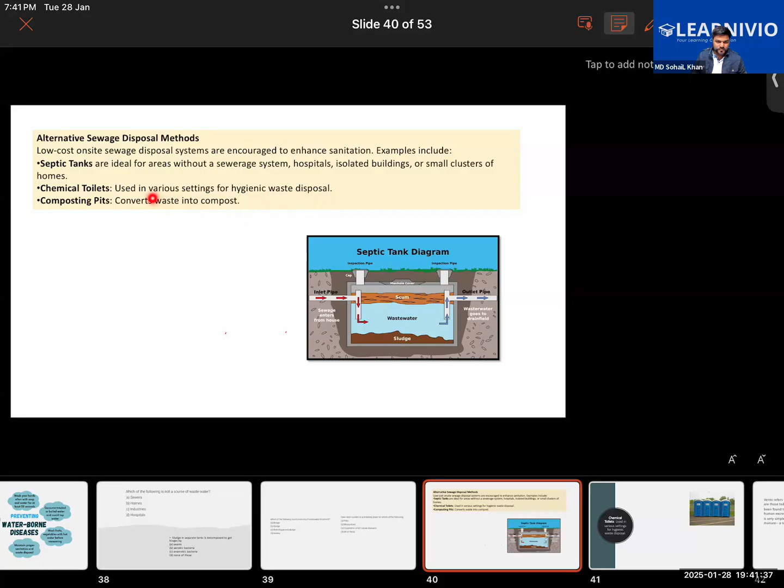The first is the septic tank. They are ideal for areas without a sewerage system, like in a hospital, in isolated buildings, or in small clusters of homes. So take a look at the septic tank diagram over here - that is a septic tank.

Now, in the septic tank, what happens? All the human waste would be going into the septic tank, getting it. And it has an inlet pipe which will be bringing it in, and it has an outlet pipe also.

A septic tank is often installed under the ground in houses or buildings, such as hospitals and schools, and it allows for the decomposition of sewage from home through the help of anaerobic bacteria. So what is happening here?

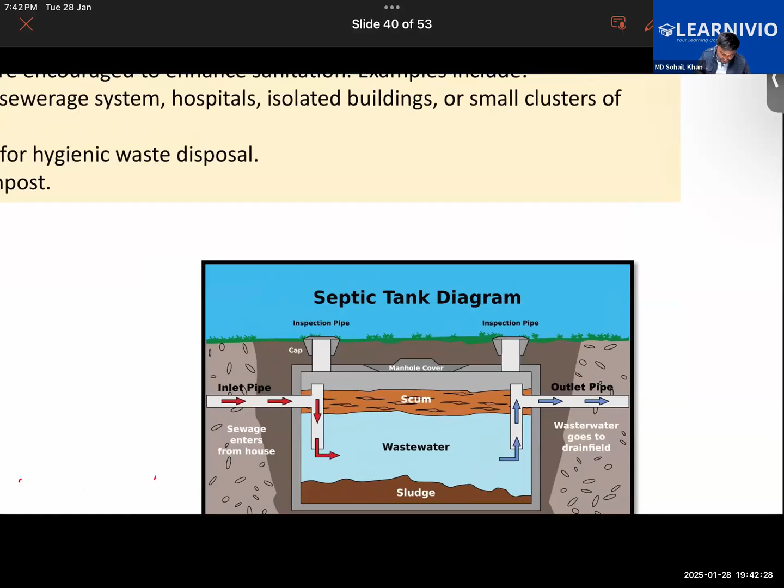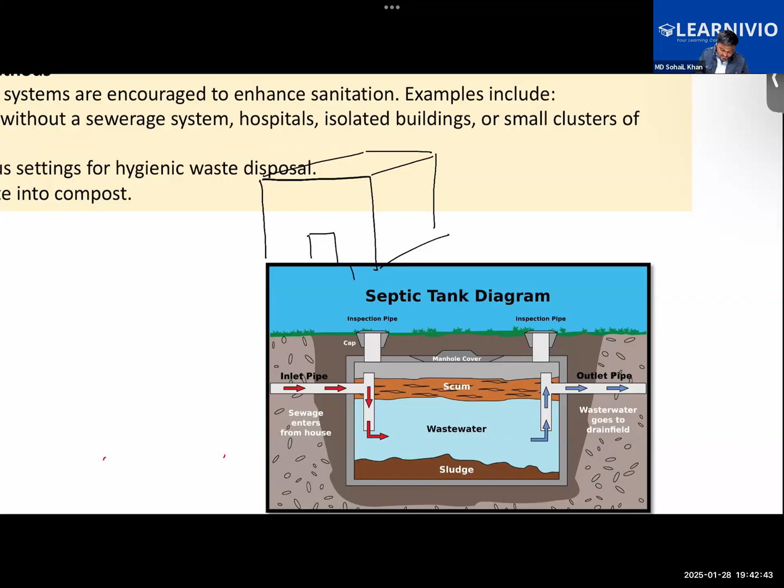See, there's a house, and all the waste from this house, all the sewage, is being sent into the septic tank. Suppose this is a pipe that is carrying the waste from the house to the septic tank.

Now, as the waste goes into the septic tank, with the help of anaerobic bacteria, it will be decomposed. With the help of which kind of bacteria?

Anaerobic bacteria decomposes the sewage that goes into this. So that is the main thing that happens in the sewage tank, in the septic tank.

Now further, there is an outlet pipe also. So what happens as the sewage enters this tank? The human waste, the fecal matter, the stool, will be settling at the bottom. The water will float above it, and there might be oil and grease particles also that will float on top of it.

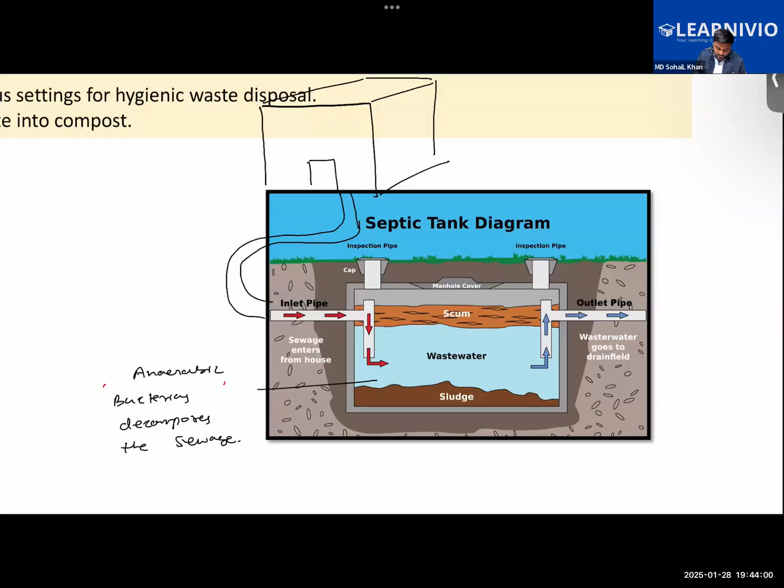So you have oil and grease like particles. They are lighter in density, hence they will float on top. That is called scum.

And on top of it, we have a manhole cover also, so that if there is some problem in the septic tank, if it is completely filled up, the sewage can be taken out through the manhole cover. Getting it, Razan?

And the waste water that accumulates in the septic tank, via the outlet pipe, is sent to the drain field. So that is how the septic tank basically works, and it is an alternate sewage disposal method.

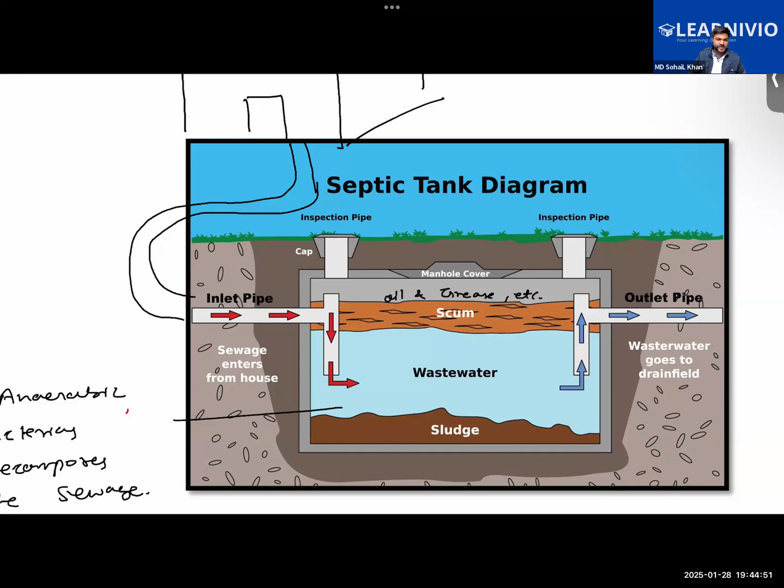Harim, right now is not the time for the class. We'll be having your class after an hour or so, I guess. Yeah.

So in this septic tank diagram, what have you understood so far? It's an alternate sewage disposal method which is often installed underground in houses or buildings such as hospitals. It allows decomposition of sewage with the help of anaerobic bacteria. Plus, it has a manhole cover through which the sewage can be taken out. If too much sewage accumulates inside, it has an outlet pipe also through which the water will be taken out and go to the drain field. Understood this? Yes.

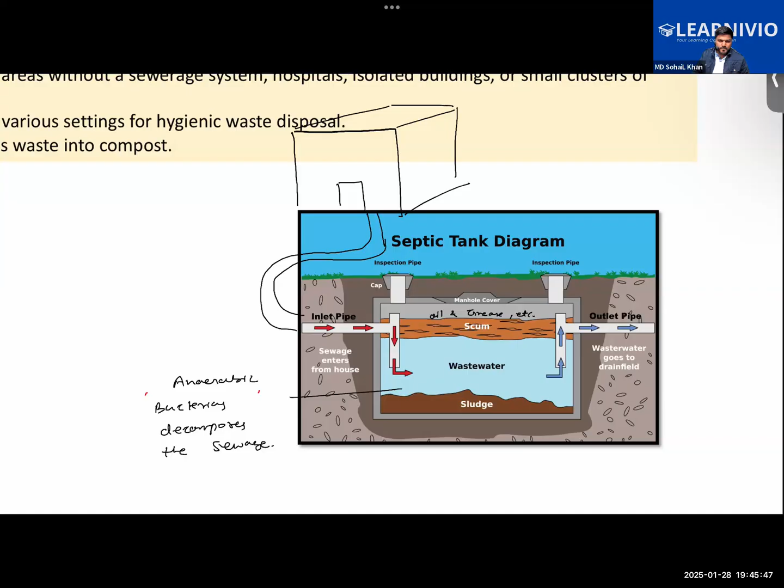What if the tank is full? That is what I'm saying - if the tank is full, then the manhole cover will be removed, and the sewage, basically the sludge, will be taken out through the manhole cover. A big pipe will be inserted into it, and via vacuum, it will be sucked out. All the sludge will be sucked out via this pipe if it is completely filled. You understood this so far?

Good. Next, you have the chemical toilets. For example, in some places where a septic tank is not built, especially in sport stadiums, when sport events are happening or some event has been organized, there we have chemical toilets.

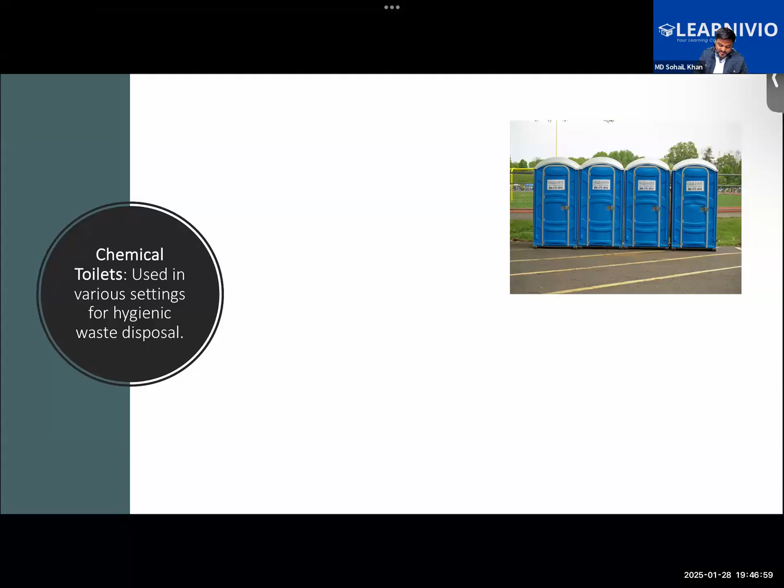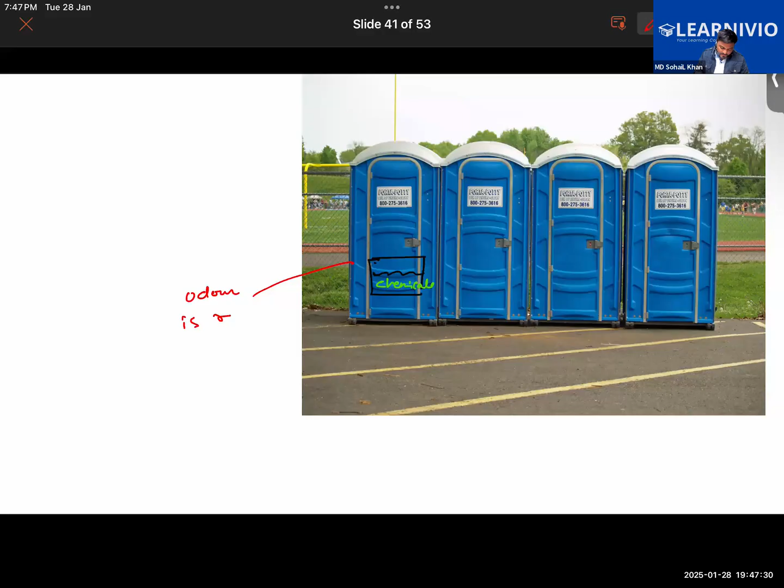So a chemical toilet basically has a compartment inside it, a small box that will be treating the human waste with chemicals, decreasing the bad smell coming out of it. So with the help of chemicals, the bad odor coming out of it is reduced. That is the concept of the chemical toilet.

Getting it so far? Yes, Razan. So far we have seen the septic tank, and the chemical toilet. They also have limited storage capacity for human waste, and it needs to be emptied regularly once it is full. These are toilets where human waste is chemically treated to reduce the smell coming out of it.

So it will be reducing the foul smell coming out of the human waste, and will also partially disinfect the human waste. So about the chemical toilets, it is

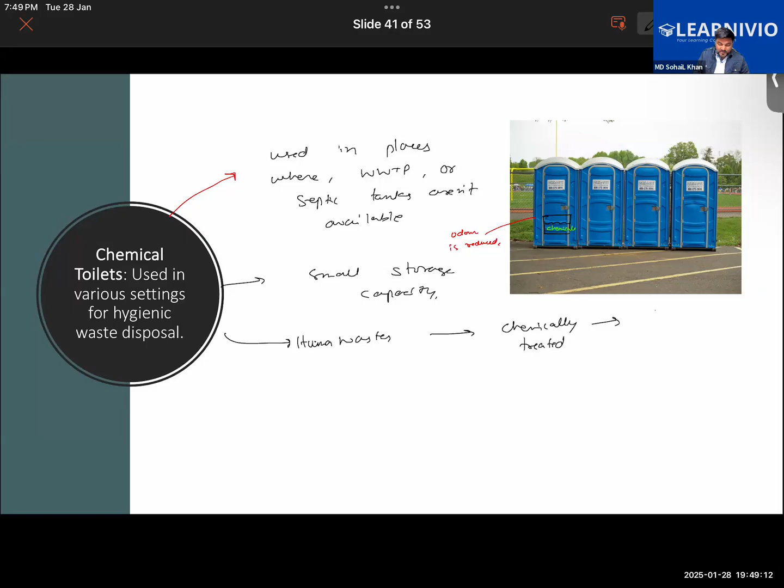particularly used in places where a wastewater treatment plant or septic tanks are not available. Next, it has a small storage capacity. Further, the waste is treated chemically - human waste is chemically treated. And what this does is reduce the foul smell coming out of it. That is all about the chemical toilet.

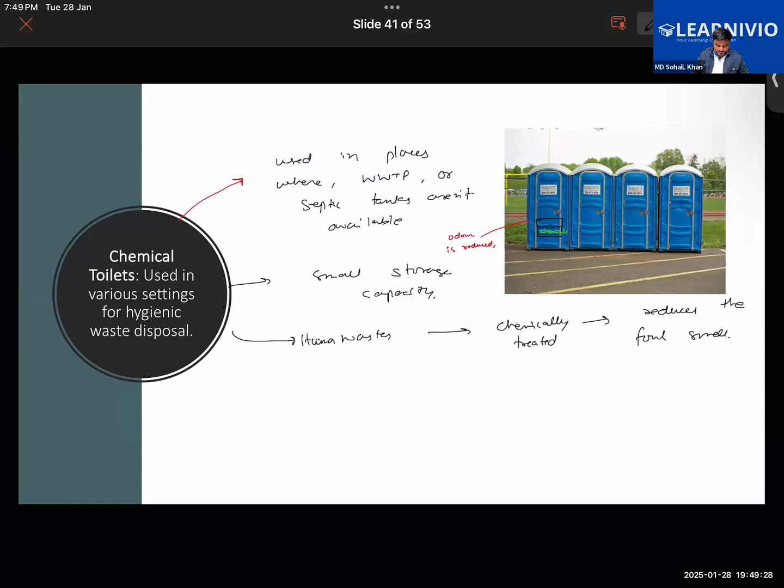After this, we have the composting pits. These will convert the waste into compost. They are kind of self-sustained human waste disposal systems. Let's see what happens in this one.

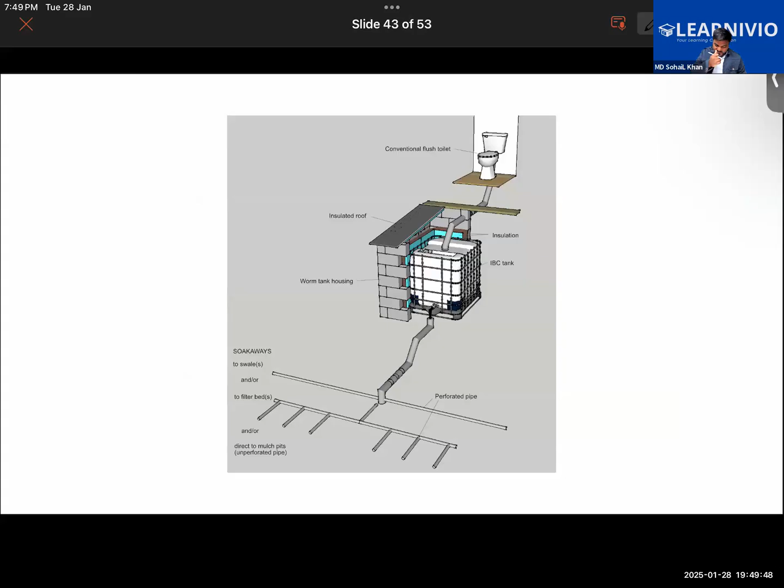Basically, first we need to understand what is compost. The word compost refers to something made due to the decomposition of organic matter - for example, vegetable peels, dead leaves, wood choppings, or grass clippings. We decompose all of this with the help of microorganisms, and due to the decomposition of these materials, a compost is formed, which is very fertile. Getting it or not?

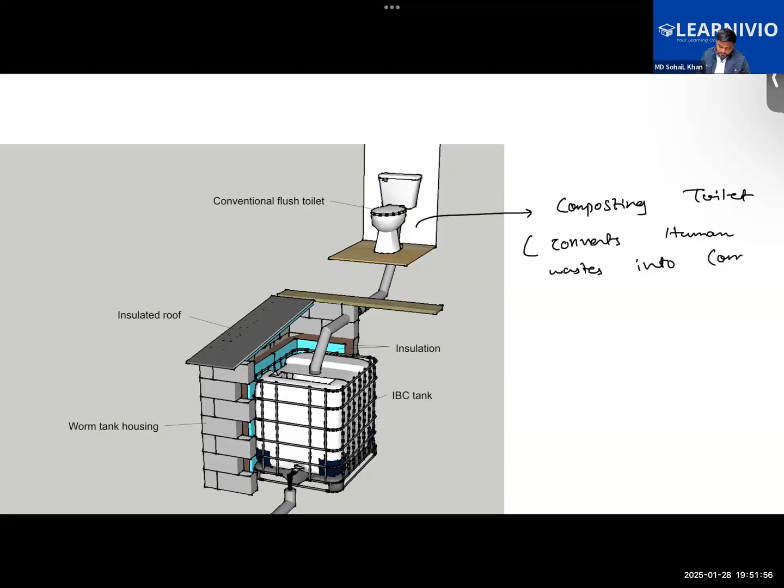Okay, see, here's the toilet. This is called a wormy toilet. What do we call this? This is called a composting toilet. This one is particularly a wormy composting toilet. Okay, composting toilet. What it does, it converts human waste into compost. Here's how it happens.

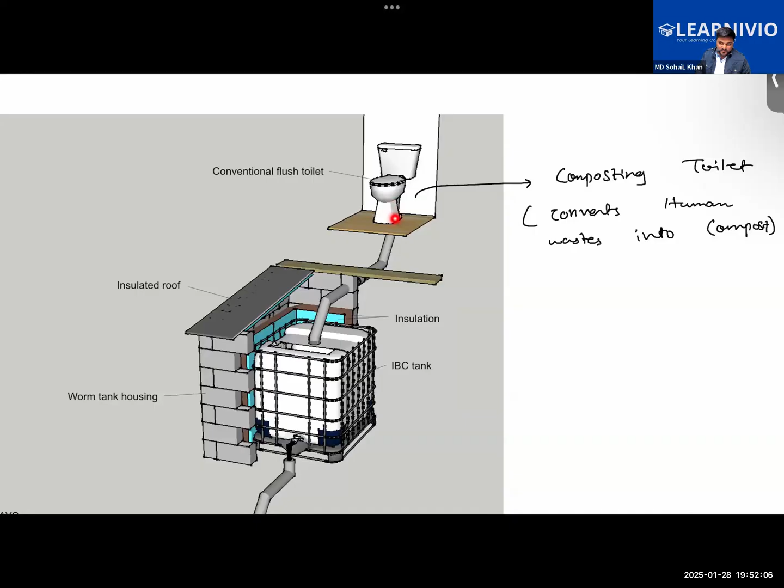Now, in this composting toilet, the human fecal matter, the human waste goes into this chamber, into this tank. And inside this tank, it converts into compost. And from another pipe, it will be taken out and reused as fertilizer. It will be added to the soil to increase its fertility.

Got it or not? Please tell me if you're getting it so far. Yeah. Say. Hmm.

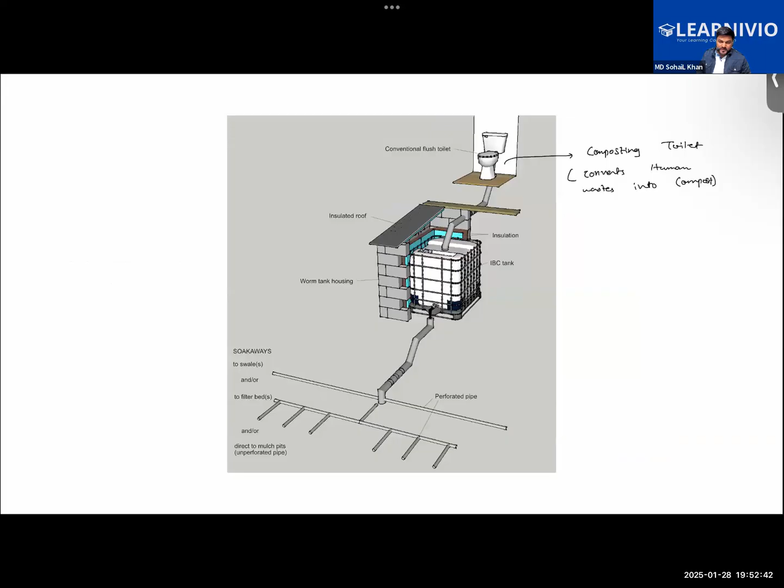Now, in order to increase the decomposition of the human waste in this tank, we might add worms also. Earthworms can also be added into this, right? So small worms like earthworms can be added to treat the human excreta, to convert it into compost.

And this composting toilet uses a very small amount of water. It reduces the consumption of water; the water required to flush the waste is very less. So these were the three main types of alternate sewage disposal methods which we have. Tell me if you have questions on any of these.

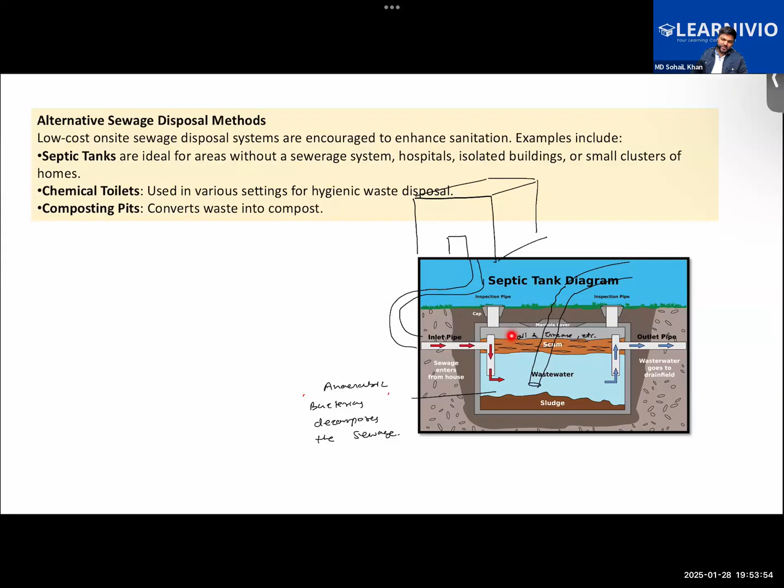No, sir. Okay, good. So the septic tank is a low cost on-site sewage disposal system. Where the sewage is produced, at the very same place it will be decomposed with the help of anaerobic bacteria. The septic tank needs to be cleaned every 6 or 12 months, depending on its size. It consists of a big covered underground concrete tank with one inlet pipe and an outlet pipe.

As the waste enters via the inlet pipe, anaerobic decomposition takes place. The human waste settles down at the bottom, and that is called sludge. Oil and grease, lighter particles, settle on top. And excess water from the septic tank is taken out through the outlet pipe and gets absorbed into the soil.

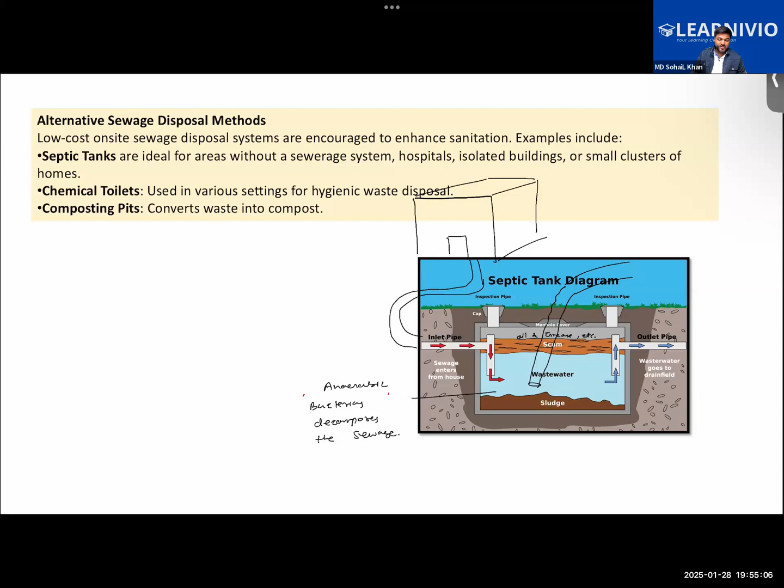As for the chemical toilets, we learned that they have limited storage capacity for human waste, which needs to be emptied regularly. With the help of chemicals, the foul smell of the human excreta is reduced, and it partially disinfects the fecal matter. As for the composting pit, the human waste is converted into compost. It can also be done with the help of worms.

Okay, let's get back to the topic. So if tomorrow in the presentation you were asked to present it, will you be able to present the alternate sewage disposal methods? Yes, sir. Good.

So we were learning about the wastewater treatment plant. So we have learned that it is a facility, a place where chemical, biological, and physical processes are used to treat the wastewater. Generally we are referring to sewage as the wastewater. And it has various benefits, right?

First of all, it is protecting our environment. It reduces pollution by treating the wastewater before it is discharged into natural water bodies, right? If we were to release the wastewater into the water bodies without it being treated, it will contaminate the river water, isn't it? So that is the first benefit, it prevents contamination of the water bodies.

Then for public health also it is important. It is removing the harmful bacteria, viruses, and pathogens, basically disease causing microorganisms, and makes water safe for human use, right? If the sewage from the house were not taken away and treated in the wastewater treatment plant, it will lead to the spread of bacteria, viruses, and pathogens, and can lead to the spread of diseases. So that is another benefit.

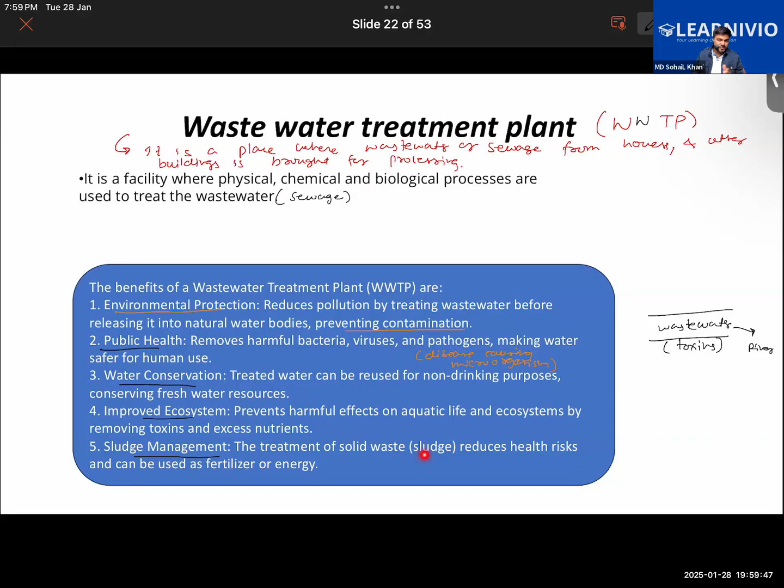If the human fecal matter that later accumulates as sludge in the wastewater treatment plant were not treated and not taken away from the homes, hospitals and buildings, the accumulation of that human waste in public areas can pose risk to people's health, right? So not only its removal is important, but it can also be reused as fertilizer and used to obtain energy. So these are the advantages.

Before we continue further, you need to take a look at this video. Pay attention to this video. After this, we will be continuing with the other steps.

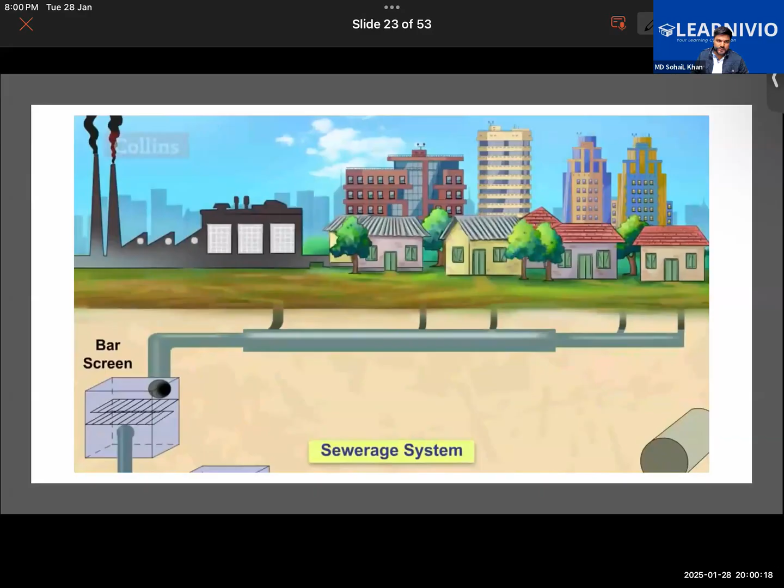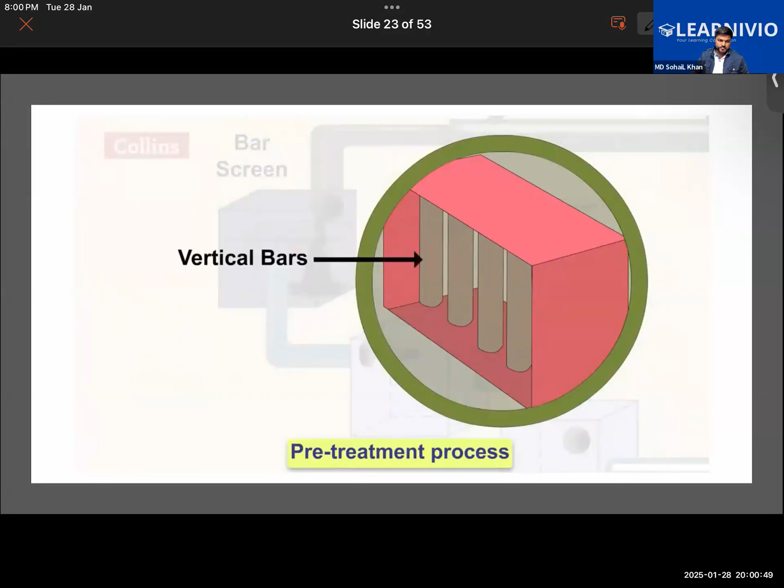Cities and towns have sewerage systems in place to carry the wastewater from our homes, hotels, factories, and other establishments to a sewage treatment plant where the wastewater is treated. It is then deemed safe to release into other water sources. The treatment of wastewater goes through different stages. Wastewater is treated to remove the physical, chemical, and biological contaminants present in it through various processes. The pre-treatment process involves the sewage being sent through grids or vertical bars that can remove large solid substances like metal cans, paper, and plastic materials.

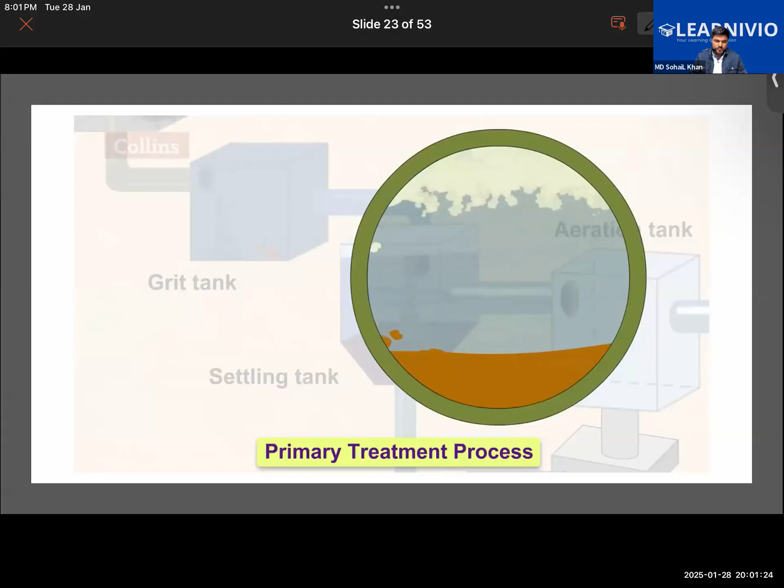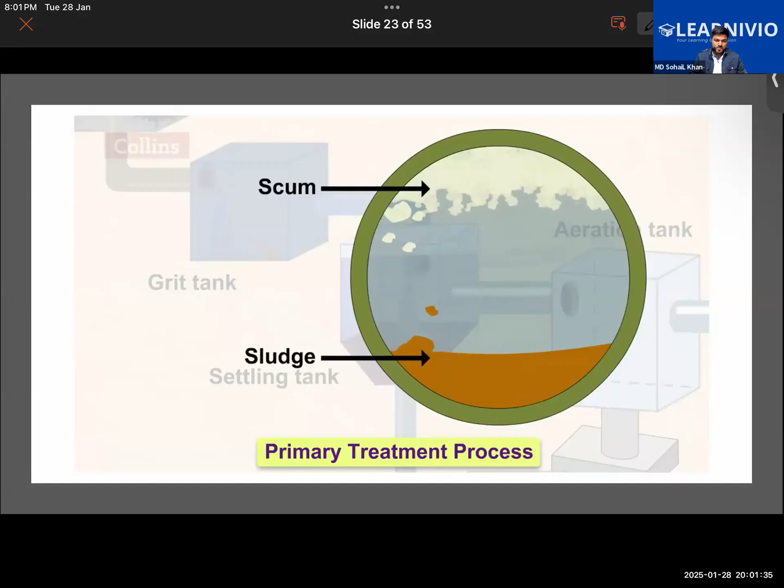In the primary treatment process, the sewage flows through the grit chamber very slowly, so that the sand, pebbles, and soil settle down at the bottom. The sewage flows into the settling tank or sedimentation tank, where solid wastes like feces are allowed to settle down. Wastes such as soaps, oils, and grease rise to the top. The waste material that settles at the bottom is called the sludge, and the floatable material is called the scum. Scum is removed using a skimmer, and sludge is removed with a scraper every few days. The water that is left is called the clarified water.

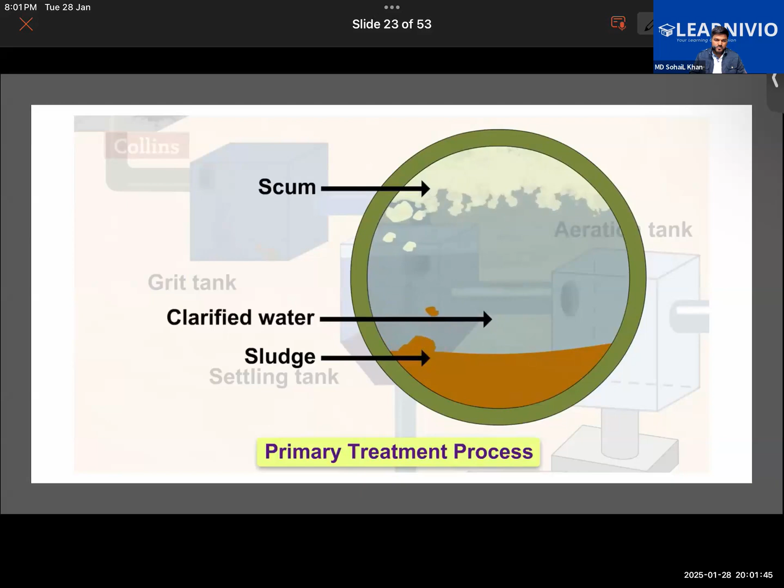In the secondary treatment process, biological or organic wastes are removed. It is a biological process. This is done by transferring the clarified water into an aeration tank, where air blowers bubble air, which helps the aerobic bacteria to grow and feed on the organic contaminants such as food waste, feces, and other organisms.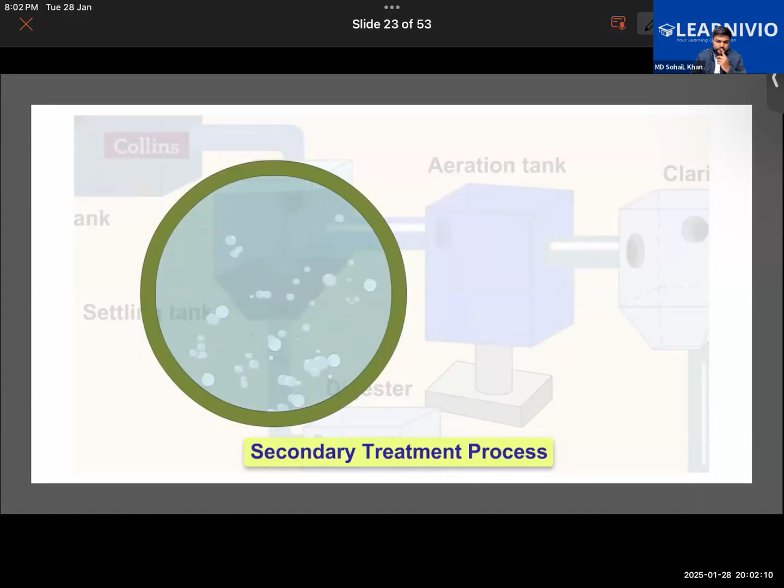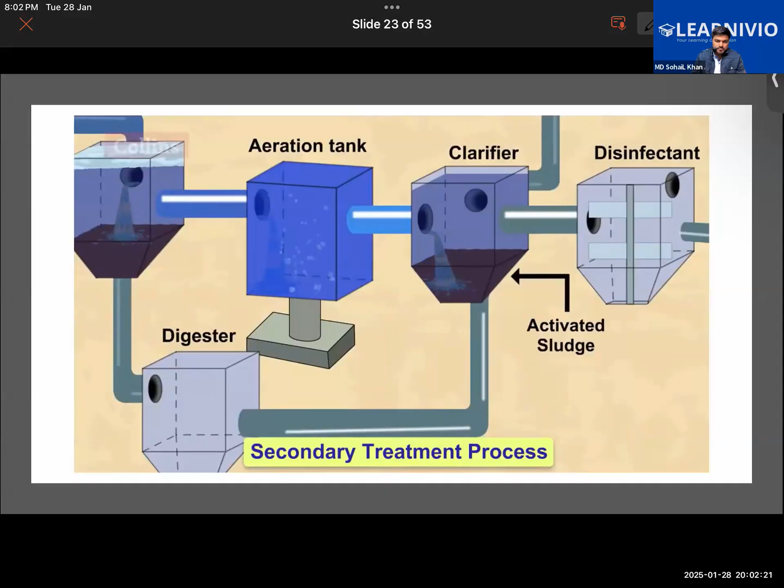The mixture then flows from the aeration tank into the clarifier, where activated sludge settles out by gravity. The activated sludge so produced, along with the sludge produced in the primary process, is transferred to the digester, where it is decomposed. Okay, I'd be pausing for just 1 minute.

See, in the sedimentation tank, in the settling tank, sludge was settling at the bottom, right, Razan? So sludge was settling, and there is another sludge in the clarifier tank also. So how are they different? Basically, sludge is kind of a general term that is used for a substance that is found in the wastewater. It is found in the wastewater, right?

Well, activated sludge is a type of sludge that is created during the sewage treatment process. During the process, this sludge is being produced, so thereby this is called activated sludge. So it's a sludge that is created during the sewage treatment. You getting it so far? This sludge is already present in the wastewater. It is a substance that is found in the wastewater. But this is the one that is being produced in the process of sewage treatment.

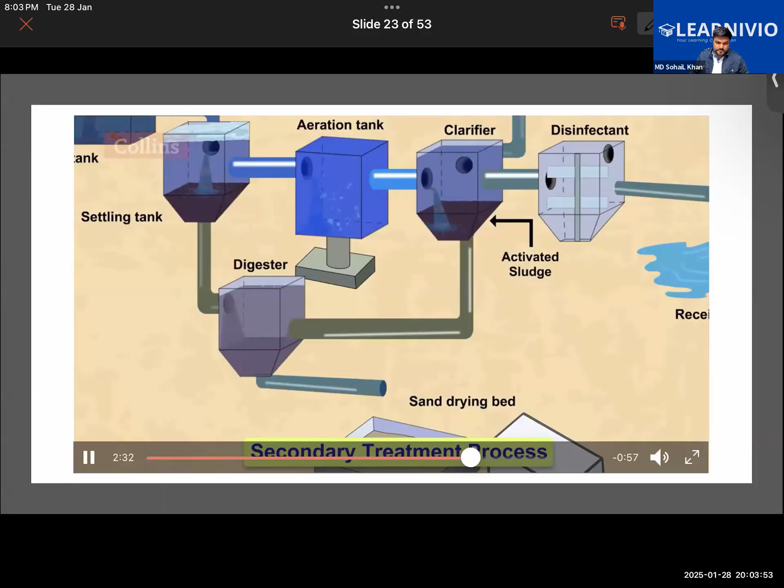Okay, let's continue. Where it is decomposed by anaerobic bacteria. Biogas is produced in this process, which can be used as fuel or can be used to produce electricity. The activated sludge is then left in the sand drying beds. Some quantity of water in the activated sludge evaporates and the remaining quantity drains through the sand beds. This leaves behind the remaining dried sludge, which can be used for making fertilizers or compost.

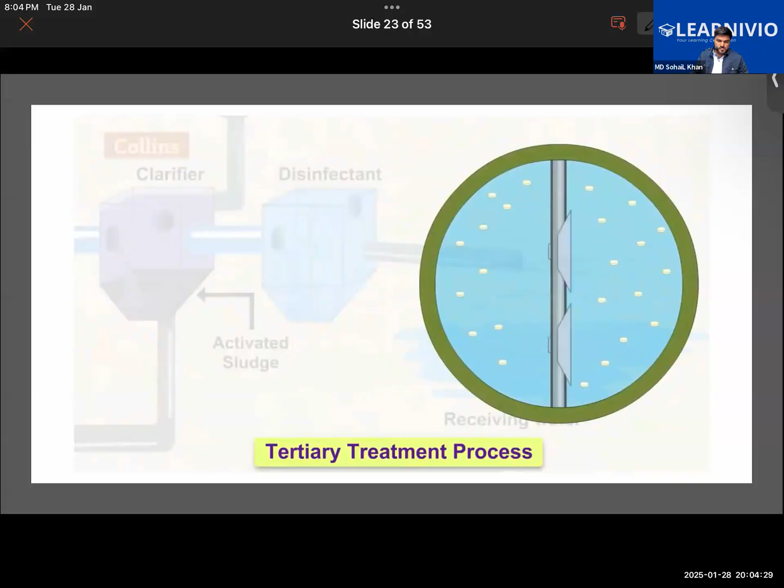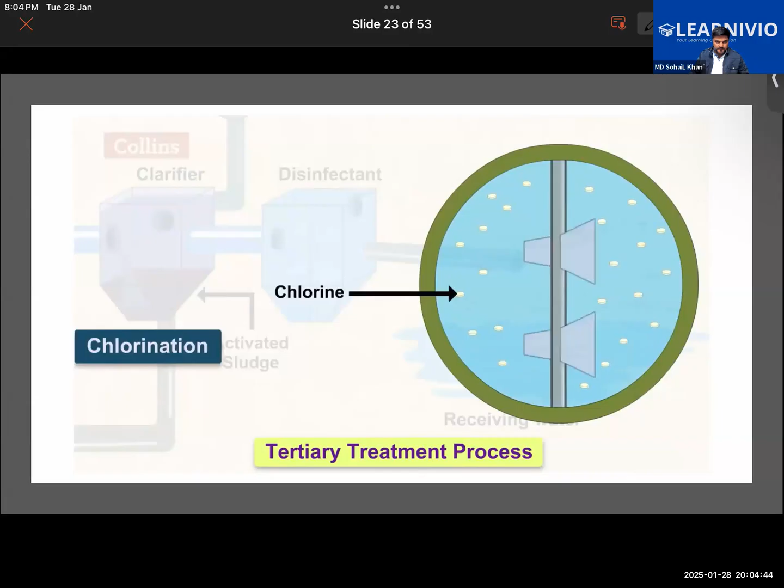In the tertiary treatment process, the leftover wastewater is treated with chlorine to remove the phosphorus compounds, nitrogen compounds, and bacteria. It is a chemical process. Chlorine tablets are added to kill the germs. This process is called chlorination. Then this water is let off into the water bodies. So that was all about the wastewater treatment plant. Hope you have understood what is being described.

Yes, sir. So let me just give a quick recap once again. First, the sewage is passing through this bar screen, right? This process is called screening, in which the solid objects like plastic cans, polybags, polythenes, etc. are separated. Then the water goes into the grit tank, where the grit, sand, and pebbles are separated. It will be settling at the bottom.

After the grit tank, it goes into the settling tank, also called a sedimentation tank, in which human fecal matter would be settling at the bottom, and that is called sludge, S-L-U-D-G-E. Let me write it over here. And light particles like oil and grease would be settling on the top, and that we were calling scum. Every 3 to 4 days, the scum is taken out. It is separated using a skimmer, and the sludge is separated using a scraper. Now, the water present here is called clarified water. Getting it? And it goes into the aeration tank.

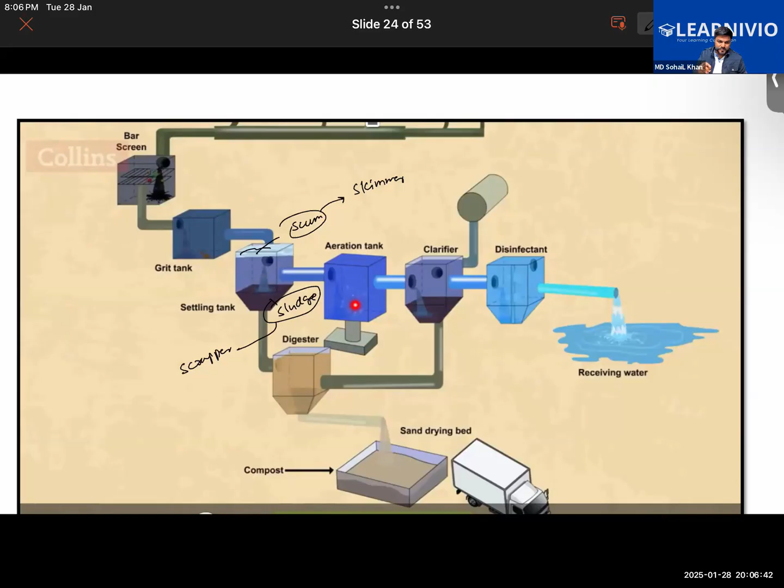In the aeration tank, what will be happening? The air is blown from beneath. Why? So that aerobic bacteria can decompose the organic substance present in it, like tiny fruit particles, tiny vegetable particles, tiny human waste. That will be eaten up by the aerobic bacteria. Aerobic bacteria need oxygen, isn't it? They need air to grow. So that's why air is pumped into the aeration tank from beneath, so that aerobic bacteria can grow and feed on the organic waste still present in this water.

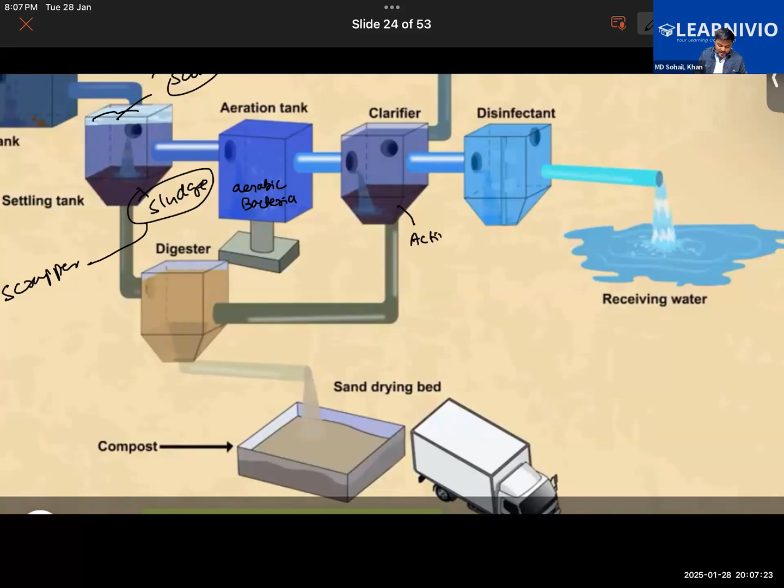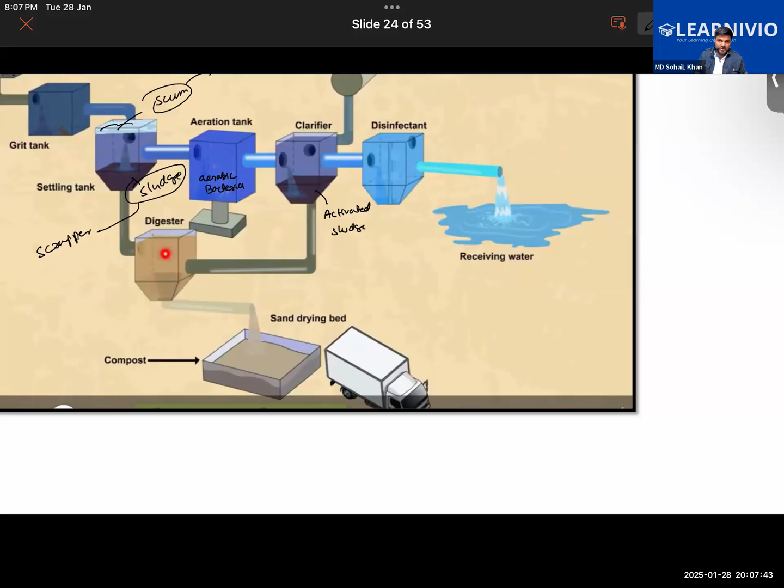After this, the water goes into the clarifier. In the clarifier, activated sludge is produced that settles in the bottom. So you have got activated sludge in this one. Now, see, from the settling tank, sludge goes into the digester. And from the clarifier tank, the activated sludge goes into the digester. Now in the digester, what happens? The anaerobic bacteria are going to break it down further. Anaerobic bacteria, you understand? They will be breaking down the sludge in the absence of oxygen.

And in the process of doing so, biogas is produced. Biogas is a fuel, so the biogas produced here will be used as a fuel. And then the sludge further goes into the sand drying bed. The sludge falling over here will have some water in it, so water will evaporate out of it. Sir, water evaporates? Yes. Then it becomes sand. Can we?

Then it will become sand? No, it will not become sand. Basically, you have taken some sand onto which the sludge is falling. The sludge coming from the pipe is falling onto this sand. Okay. Then what will happen?

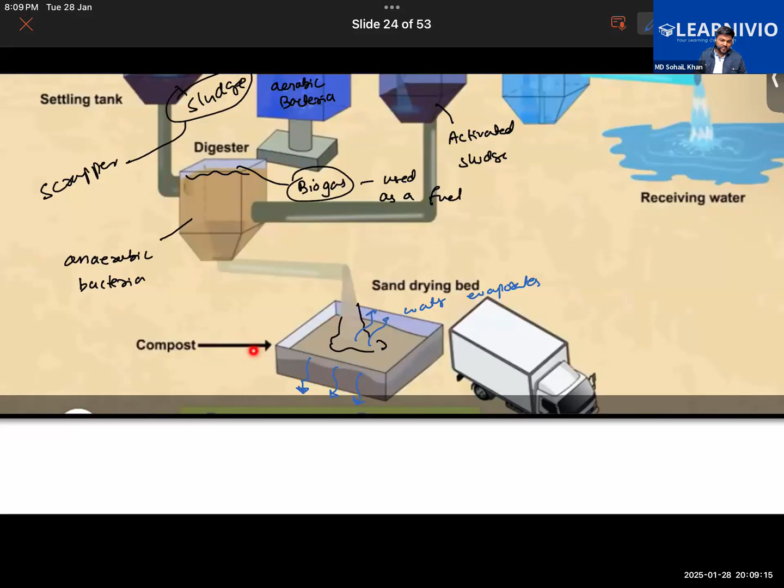The reason why we have taken the sand is because the sludge will still have some water, and the water will percolate through the sand like this. The water present in it will percolate through the sand, some of the water will evaporate, and the sludge will be left in the open sun for drying. And it has basically converted into compost, which can later be spread on the crop fields to improve the fertility of the soil.

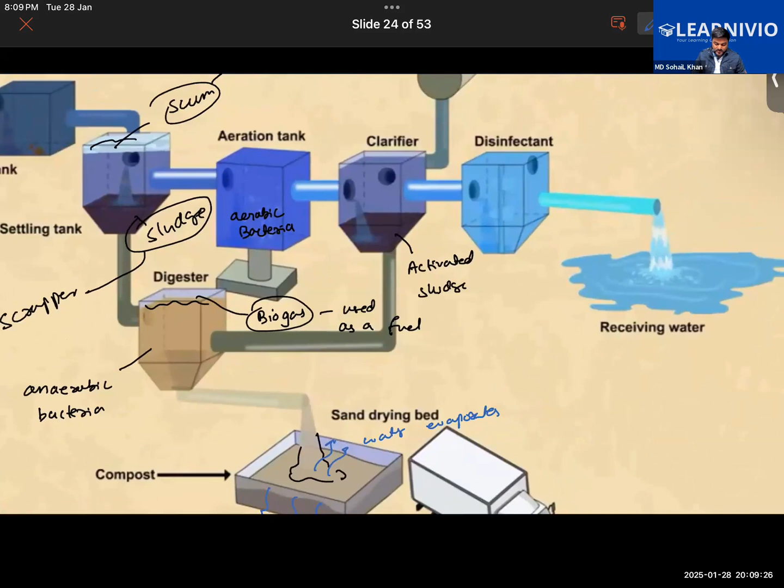Then coming to this other tank. Water from the clarified tank then goes into the disinfectant tank. Now in the disinfectant tank, chlorine tablets are put. These are the chlorine tablets. What would the chlorine tablets be doing? It will first kill the bacteria. Kill bacteria.

Next, it removes harmful chemicals like nitrates and phosphates from it. So it removes the harmful chemicals. For example, you have nitrates or you have phosphates. So those harmful chemicals are removed from the water. And this whole process is called chlorination.

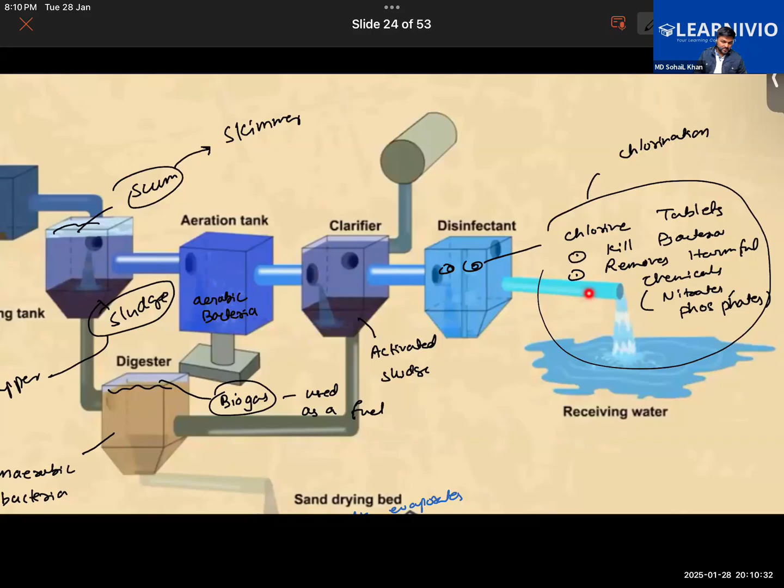And finally, after chlorination, the water is completely disinfected and it is safe for being released into the water bodies. It can also be reused for non-drinking purposes like washing the car, watering the crops, etc. So in short, I have tried to explain the whole method that is used in this wastewater treatment plant. Getting it or not?

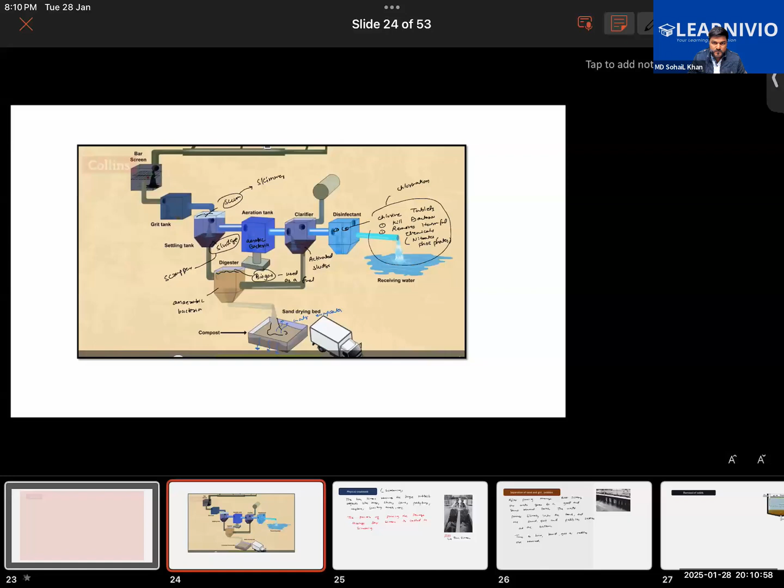Okay. Have you prepared any notes from this chapter so far? Have you written anything? No, sir. No? Okay.

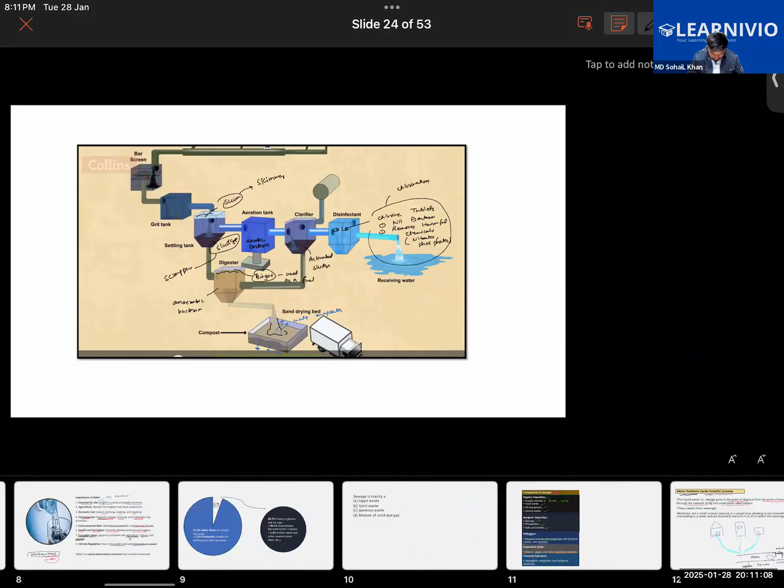So in the previous class, I described in detail the physical treatment, that is the screening method, which is done with the help of bar screens. Then we learned about the grit tank, right? This is the grit tank. Sir, will all these tanks be underground? No, they are not underground. They are above the surface, above the land. But we can't see them. No, we can actually see them.

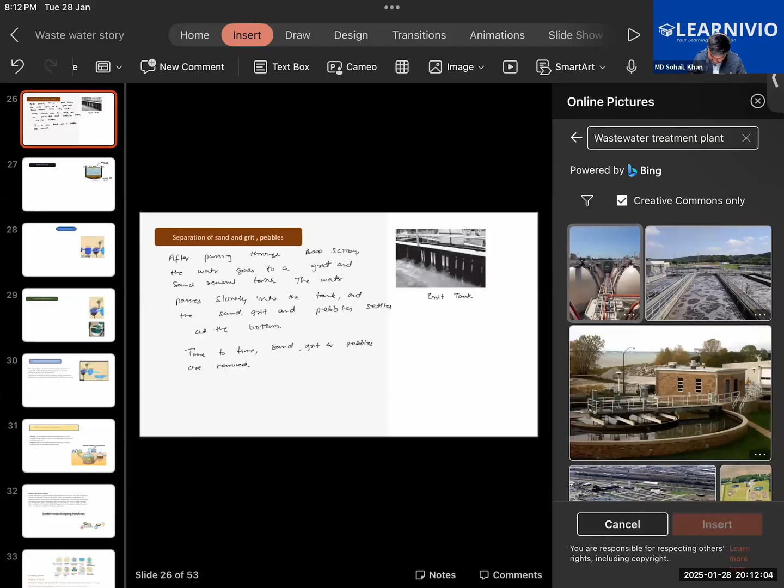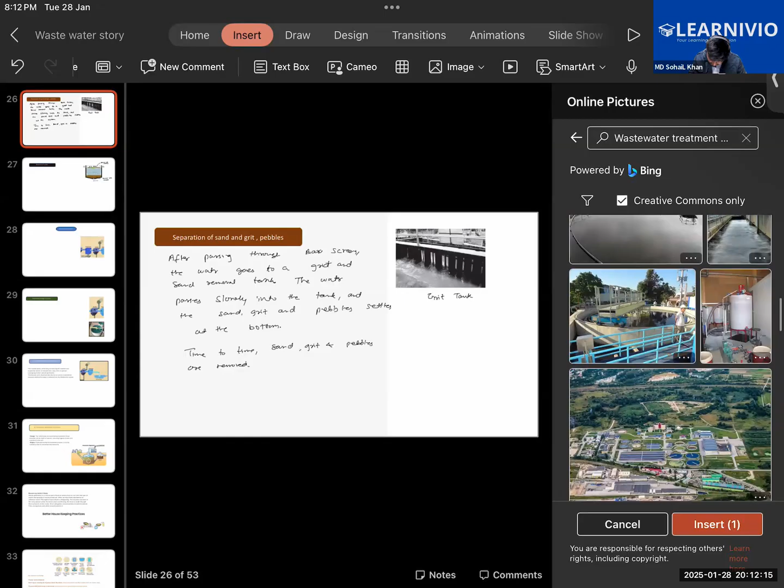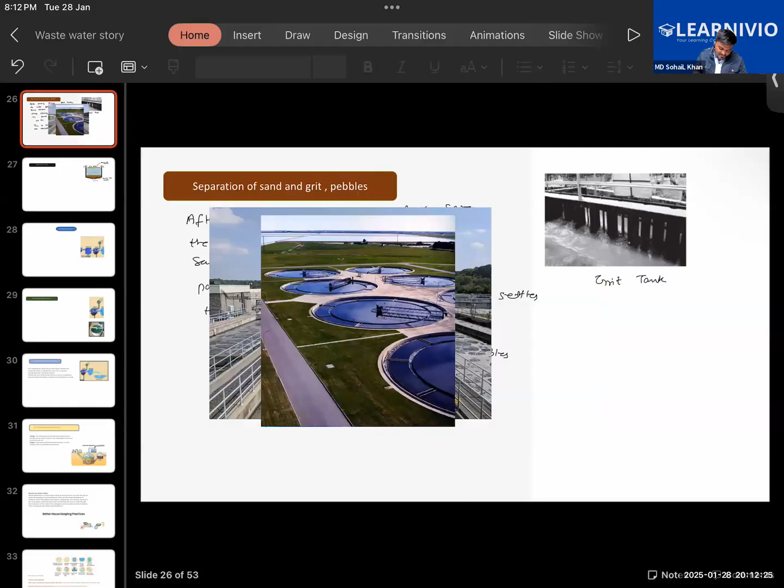Let me show you an actual image of this wastewater treatment plant. We might get some relevant images. See, take a look at this one. You see this one? All these are different tanks here. They'll be that big? Yes, they are very big, because the water from the whole city is coming to this place. So it is very big.

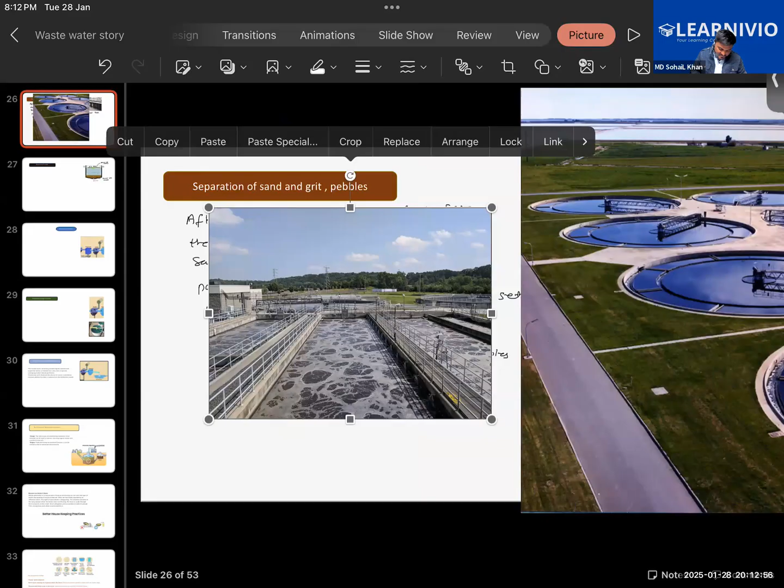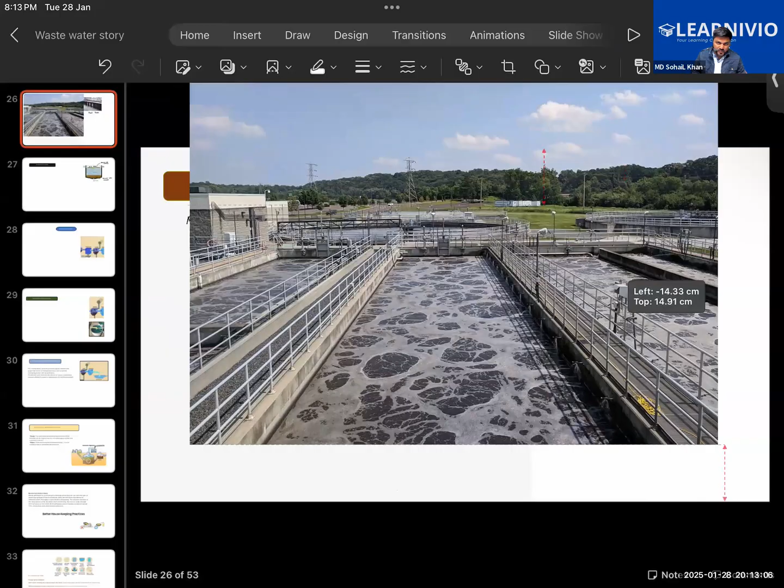So some of them would be the grit tanks, some will be sedimentation tanks, some would be aeration tanks like this. As you can see here, this one has a different design. In this one, you will see the sewage is passing through the different tanks. So they are not underground, they are above the surface. So, physical treatment.

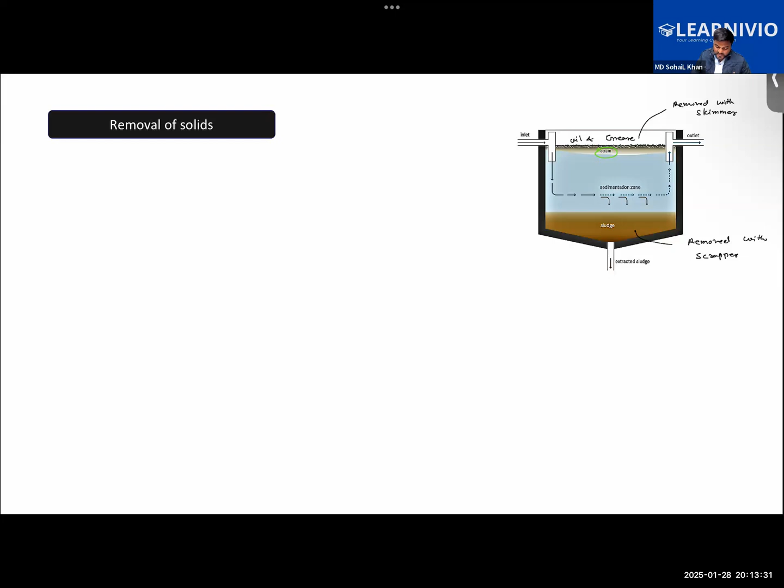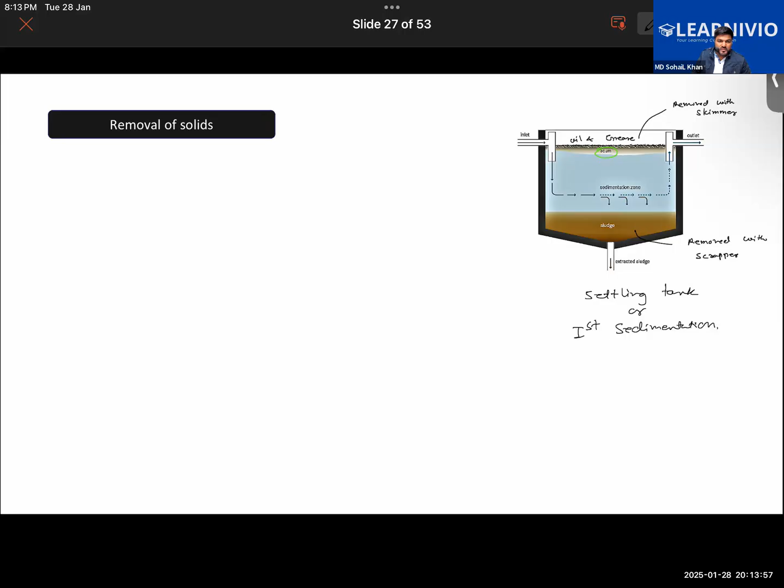In the physical treatment, we have learned about screening and separation of pebbles, sand and grit. Then talking about the removal of solids. So what happens in the settling tank? This one was the settling tank, right? Settling tank, or basically the sedimentation tank, the first sedimentation tank. Why are we calling this the first sedimentation tank? Because there are two sedimentation tanks. Keep that in mind.

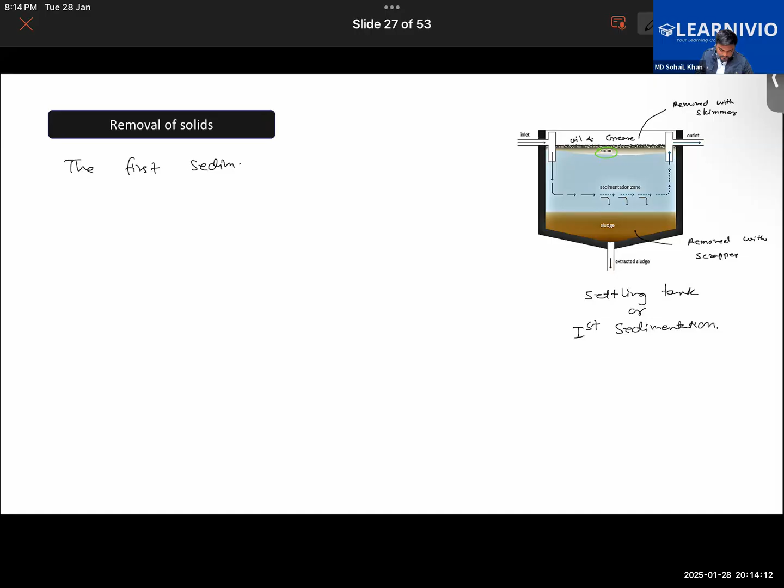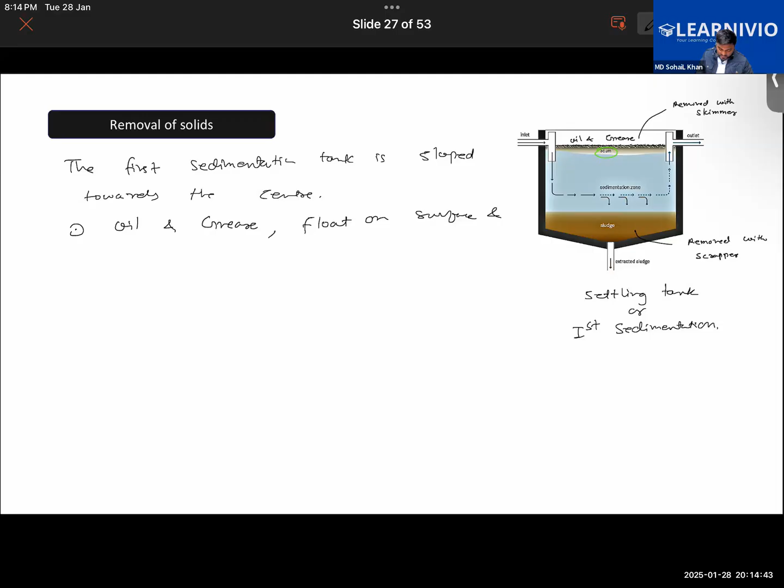So the first sedimentation tank is sloped towards the center, as we can see here. In this, what happens? Oil and grease would be floating at the surface, and this is called scum. Further, it is removed by a skimmer. Every 3 to 4 days, it will be removed with the help of a skimmer. Getting it?

Next, we have the solid waste. Solid waste, like feces, settles at the bottom, right? And this is called sludge. And sludge is removed with the help of a scraper.

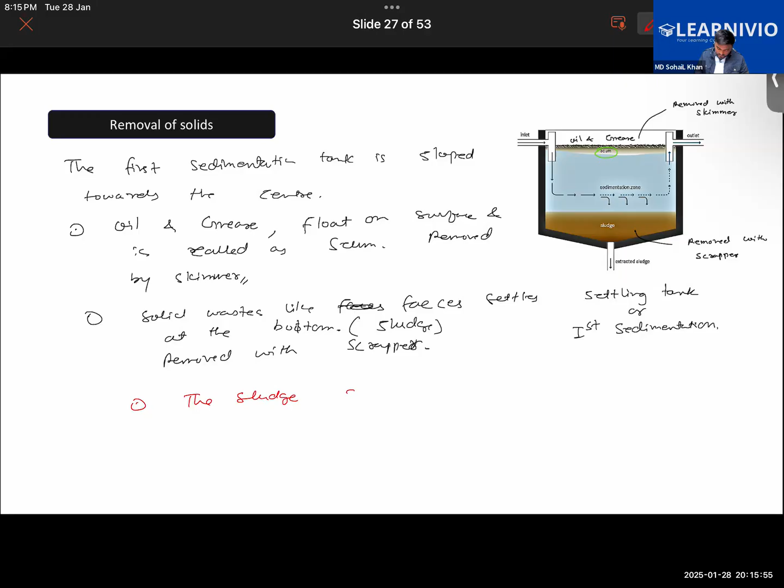Then what is happening to the sludge that is removed here? It goes to the digester tank. It goes to the digester, right? Getting what I'm trying to say? So the sludge goes to the digester. We will get back to the digester once again after some time. The activated sludge will also go into the digester. We'll be learning about both of them together.

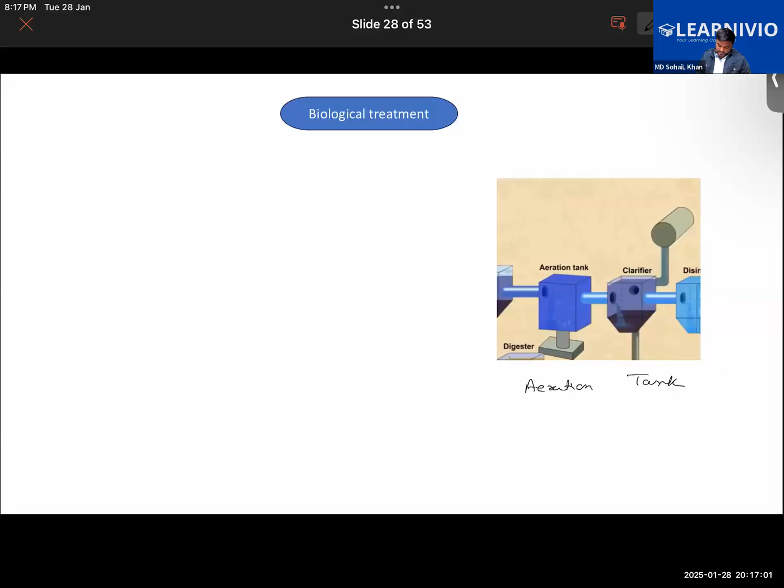So the water that gets cleared out of the rubbish, oil, grease, and sludge, we get as clarified water, which is now being sent to the aeration tank. Now in the aeration tank, the watery waste already contains bacteria. Aerobic bacteria are already present in it, right? We are not adding it. It is already present in the watery waste coming into the aeration tank.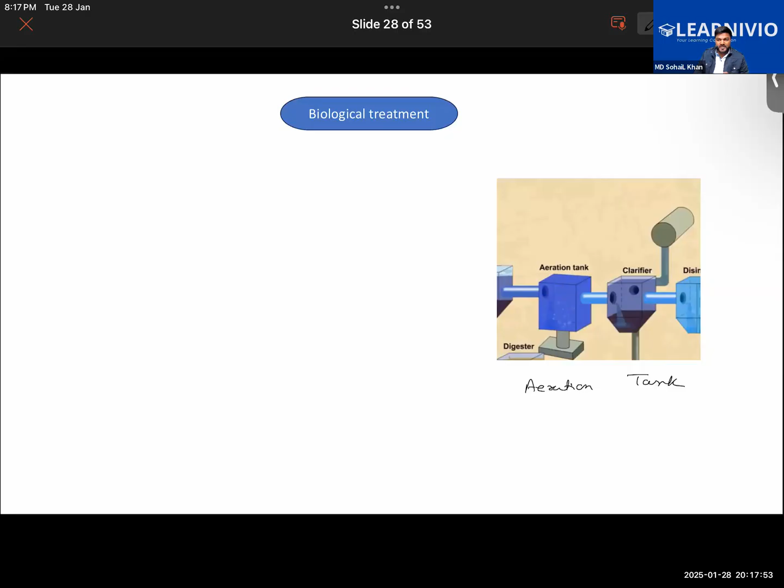So now we are compressing air bubbles into this waste to provide oxygen to the bacteria so that we can increase the bacterial activities, which will digest the human waste, food waste, soaps, and other unwanted harmful matter still remaining in the wastewater. Getting what I'm trying to say?

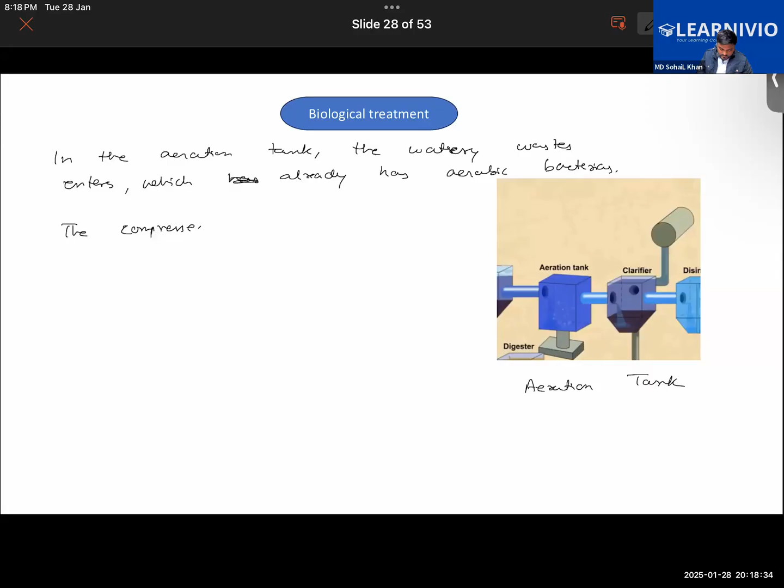So in the aeration tank, the watery waste enters which already has aerobic bacteria in it, right? Then the compressed air bubbles are passed through this waste to provide

oxygen to the bacteria. What kind of bacteria are they? They are aerobic bacteria, right? Yes, sir. Oxygen to the aerobic bacteria to increase the bacterial activity. Then what will the bacteria do? The bacteria digest the small food particles. Exactly. It will also digest the human waste, if some is still present, soaps, etc.

And now it leaves fairly pure water. Although not completely pure, it is fairly pure. So can we drink it? Of course we cannot drink this water right now. It is not fit for human consumption. Even when the water comes out from the disinfection tank, it is still not fit for drinking. We can use it for other purposes, but not for drinking. Getting it now? So that is the case.

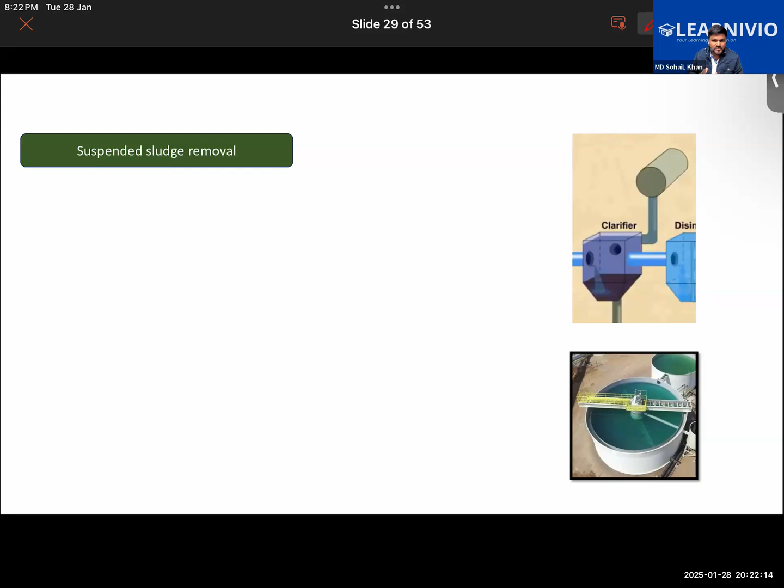No, no. Usually, the wastewater treatment plant is away from the city, away from the crowded places. It is kind of outside the city, not close to where the people are living. Okay, Razan. So those might be something else.

Now, the water after the aeration tank is allowed to stand in a second sedimentation tank, which is called a clarifier. Here the microbes present get settled at the bottom of the tank in the form of activated sludge. Whatever microorganisms are present in the water coming from the aeration tank will settle at the bottom as activated sludge. This activated sludge is basically 97% water.

So at this stage, the water has a very low level of organic matter suspended in it, and does not contain many harmful things. Now it is safe for general use, but it is disinfected by chlorine or ozone before distributing it. So let us understand what happens in this clarifier, which is basically the second sedimentation tank.

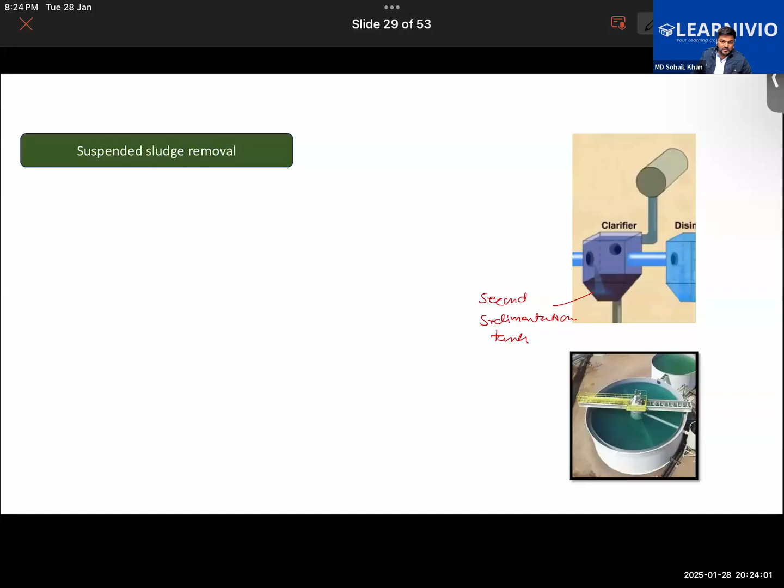Second sedimentation tank. You will see that the structure of this and the first sedimentation tank were similar. Both of them were sloping at the center. So the water, after the aeration tank, goes to the clarifier, that is the second sedimentation tank.

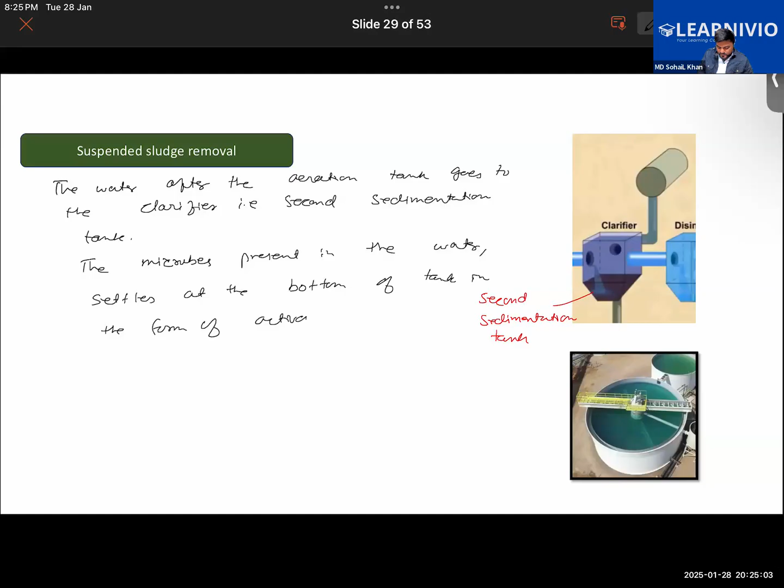In this, what is happening? The microbes present in the water, in short microorganisms, settle at the bottom of the tank in the form of activated sludge. This activated sludge is 97% made up of water only, keep that in mind.

So at this stage, we see that the water has a very low amount of suspended organic matter. Organic matter, suspended organic matter, basically would be small food particles, small human waste, or soap particles that remain suspended into the water, does not settle down, but remains in it.

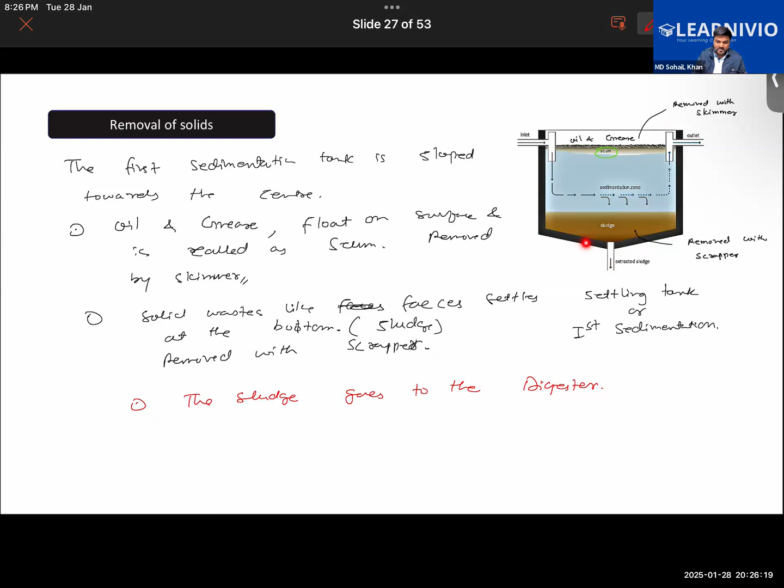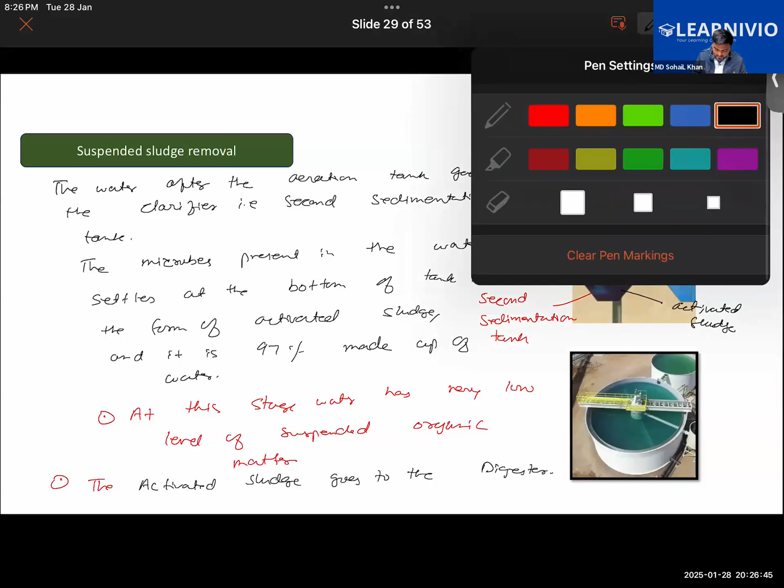Now, what happens to this activated sludge and the sludge that was being produced in the first sedimentation tank? From there, the sludge was going to the digester, and from this tank also the sludge goes to the digester. It is not being removed with the help of a scrapper here, that was only in the first sedimentation tank. So the activated sludge goes to the digester, and the sludge from the first sedimentation tank also goes into the digester. What happens in the digester now, we'll be learning about that.

As the sludge goes into the digester, it will lead to production of biogas, and that biogas will be used as fuel. Also, compost will be prepared from it. We'll be discussing about the digester later on.

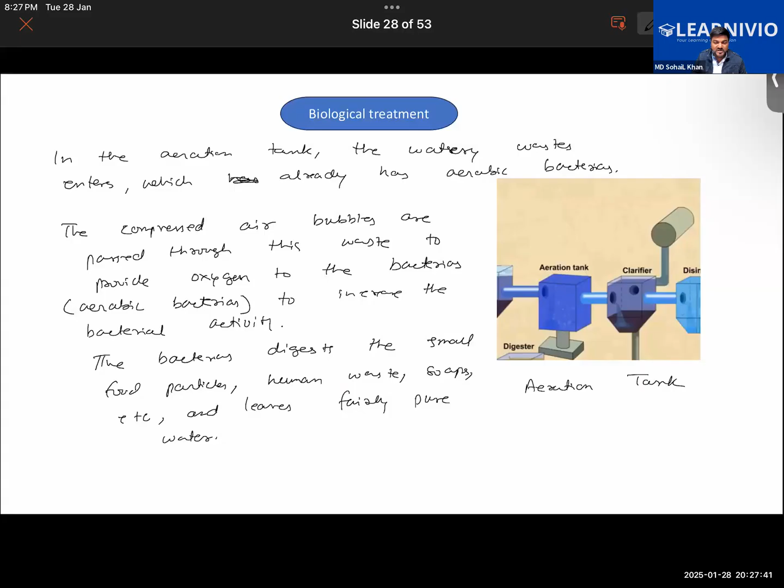So after the clarifier tank, now the water goes into the disinfectant tank where chlorination happens. As we discussed, chlorine tablets are added that will kill the harmful bacteria present in it and will also remove harmful chemicals present in it. Sometimes we even give ozone treatment to the water. The treated water, now having very less suspended organic waste, is sent into the disinfectant tank. So disinfection with chemicals like chlorine, or sometimes ozone, is done before it is distributed to people or released into the water body.

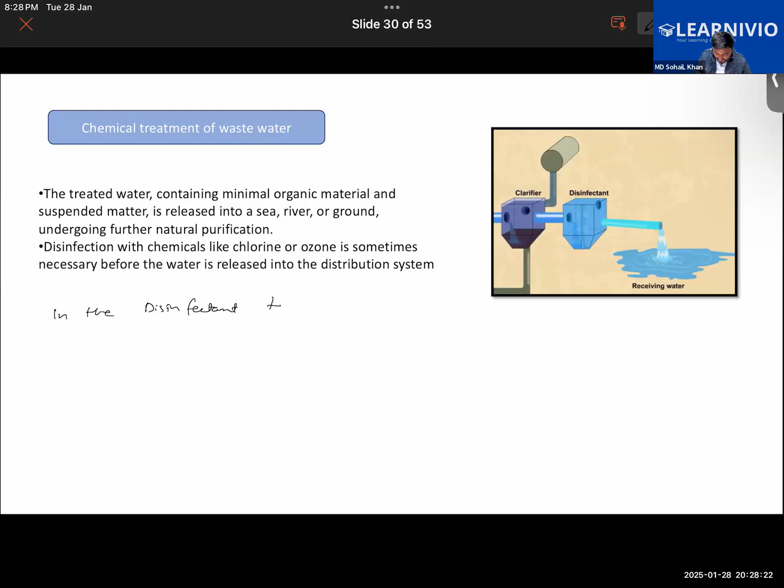So in the disinfectant tank, a chemical process is done, and chlorine tablets are added to kill harmful bacteria and remove harmful chemicals. This process is called chlorination.

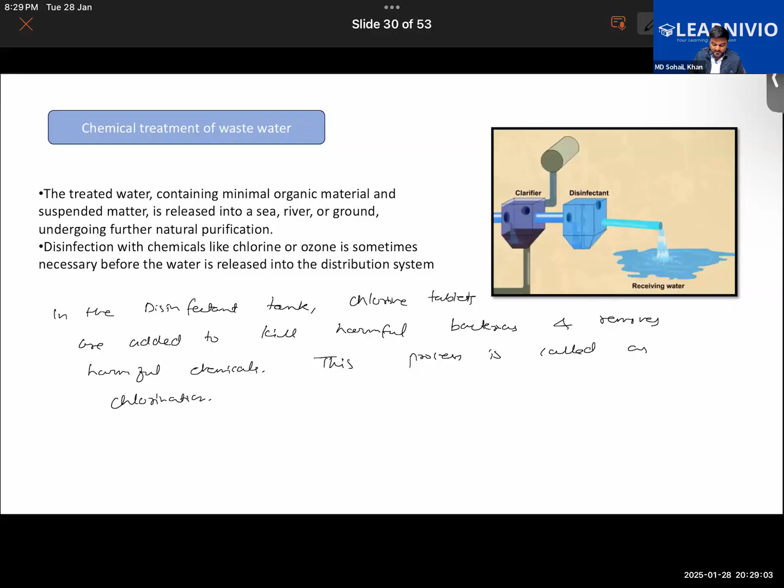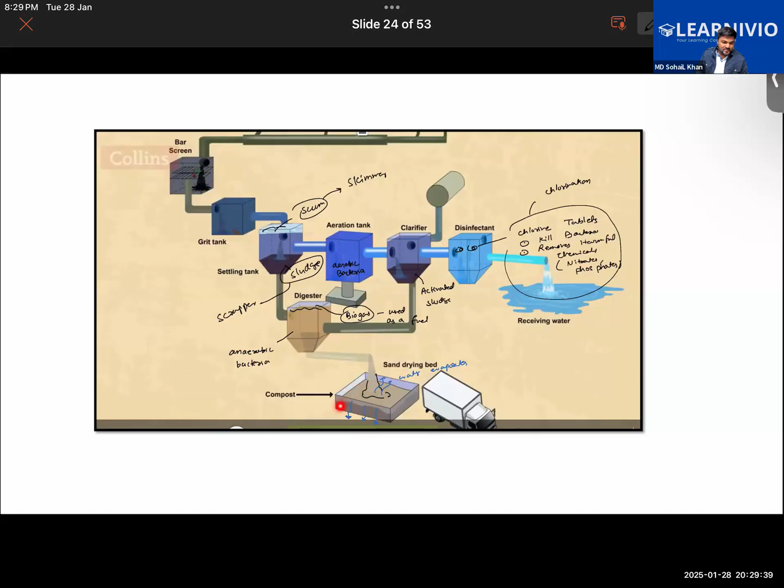Now, what about the sludge and the activated sludge? The sludge and the activated sludge go into the digester where biogas is being produced. If you recall the diagram, we had learned that biogas is obtained, but the sludge later falls onto the sand drying bed, where the excess water evaporates and some of it percolates through the sand, and then it is converted into compost and later used as manure.

So in the digester tank, biogas is produced that will be used as fuel or can be used to produce electricity also. Then the sludge, after being dried on the sand beds, can be used as manure to increase the fertility of the soil.

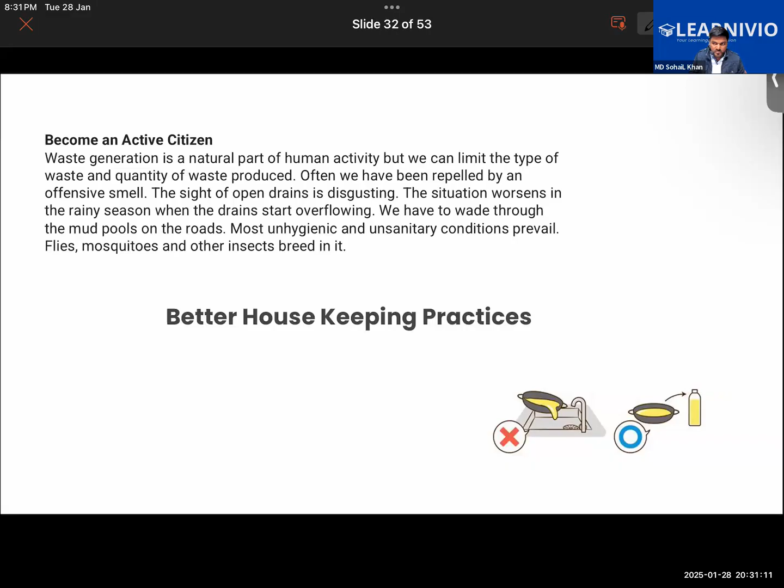So that is all about the wastewater treatment plant. An important thing to consider is that these two are the byproducts of the wastewater treatment plant. A byproduct is something you get that you did not intend to get, but you get it as extra. We intended to get clean water out of this, but in the process, we got the biogas and manure as well. So those are the byproducts. That was all about the wastewater treatment plant. Hope you have understood this.